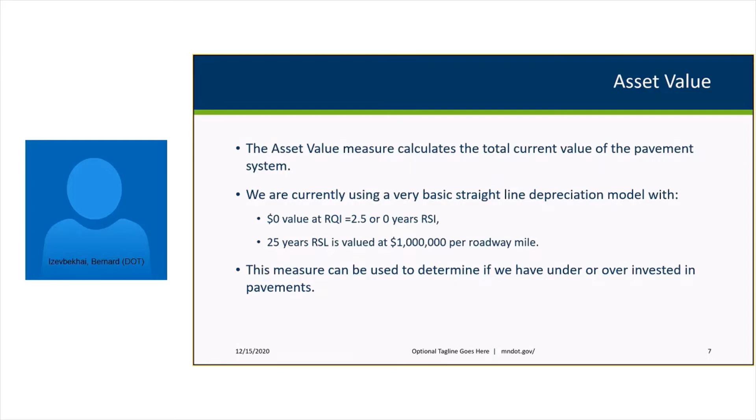There were certain things we did when we were trying to develop what I would call, in those days, a pavement investment manual. Now it's a pavement investment evaluator. The manual actually did compel us to look into the remaining service lives of all the fixes in the network. And at the end of this presentation, you will see that we actually did that. And unbonded overlay happens to be a microcosm of that large analysis that we did.

So there are many health indicators in our network. You have remaining service interval. There's the cost per lane mile. There's the asset value. These are all defined, but time will fail us. There's the asset sustainability ratio.

In other words, by the new construction you did this year, how much have you dealt with the natural decline in remaining service life by the new construction or the new activities that were added to the network in a particular year. So the asset sustainability ratio is a great index. And then, of course, there is the remaining service interval, and there is the asset value.

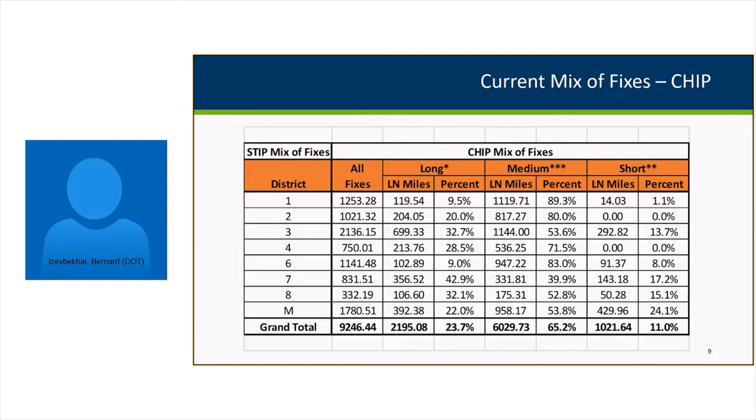But when we mix the long-term fixes and the short-term fixes in an optimized mixture, then we think it helps a great deal. There is a certain analytical method with which I will explain this better as we go along.

Now, what is unbonded overlay? We've been talking about unbonded overlay. If you have a pre-existing concrete pavement, there are many things you can do. You can pulverize it. You can do a crack and seat, or you can build a concrete pavement on it. Remember, you already have real estate right there. So to remove it completely and do a regrade and reconstruction might not be very cost effective. But if you have this existing concrete pavement, there are a few more things you can do.

interlayer. What is that interlayer? Most people call it a bond breaker, but I hasten to say that it's not a bond breaker. It is a stress relief layer. If you don't have it, you have tremendously high stresses. But if you do, you relieve the stresses.

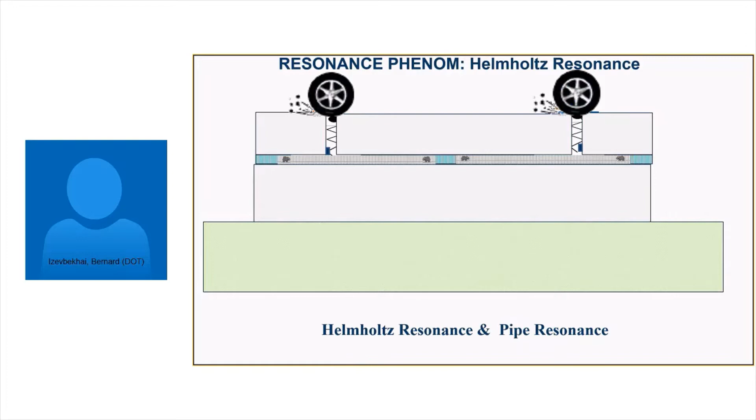With the reduction of such stresses, then there is longevity. No wonder unbonded overlays last very long. If you didn't have that stress relief layer, those tremendously high stresses will cause very early degradation, and it will compromise the service life. So the stress relief layer is a very vital aspect of unbonded overlays. That's the reason why when people call it a bond breaker, I say, no, it's not a bond breaker. It is a stress relief layer.

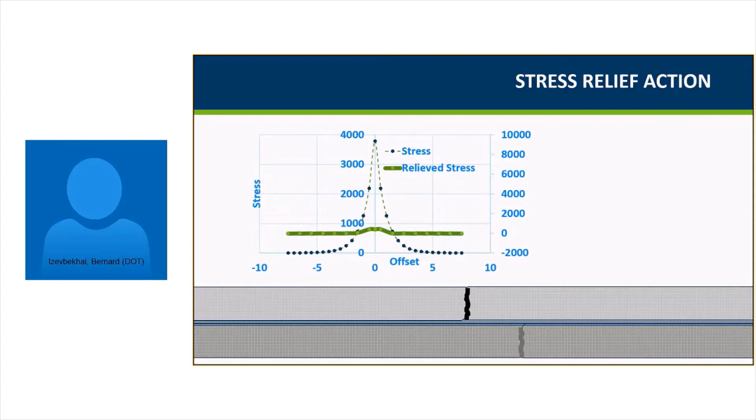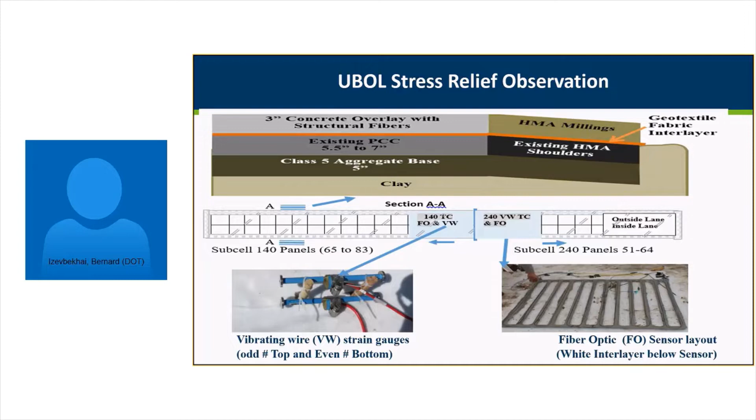To validate the fact that stress relief does occur, we did an experiment at MnROAD. We used fiber optics for the first time in 2013. We put some fiber optic sensors on cell 140 and cell 240, contiguous cells, where we had a thin unbonded overlay, 3 inches. What we found out was very impressive, because hitherto we all assumed that the stress relief layer causes stress relief. Nobody ever really validated it.

There must have been some work done by Khazanovich, and there was a little bit of an inroad into this by Alexandra Akkari and I. We did some work some years ago where we showed that there was some stress relief. Then we used vibrating wire sensors. And so we showed that there was an attenuation of stresses, but we didn't really validate it, and we didn't go out to present it or anything.

Now, cell 240 had a thicker interlayer. We were trying to investigate if we could go down to a thinner interlayer. So the stresses were more reduced with the thicker interlayer than with the thinner interlayer. Now, that has a limit. If we had continued to increase it beyond about 3/4 of an inch, then definitely we're introducing another model altogether, and it's no longer providing the stress relief the way we want it to.

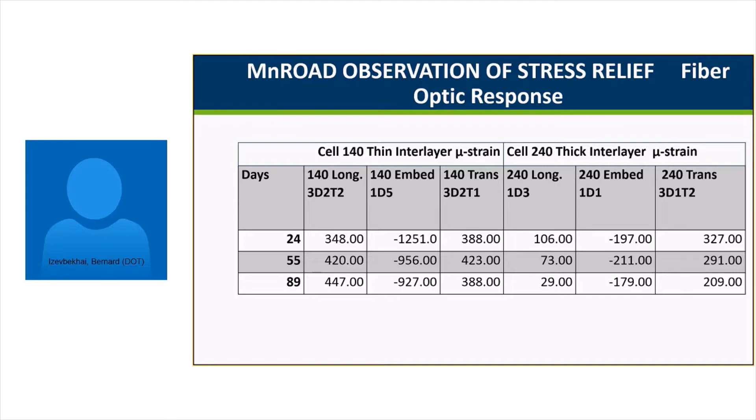And you see that at all times, cell 240 had strains that are less than cell 140. Cell 240 had a thicker interlayer than the thinner interlayer. And these were from fiber optic responses in contiguous cells 140 and 240.

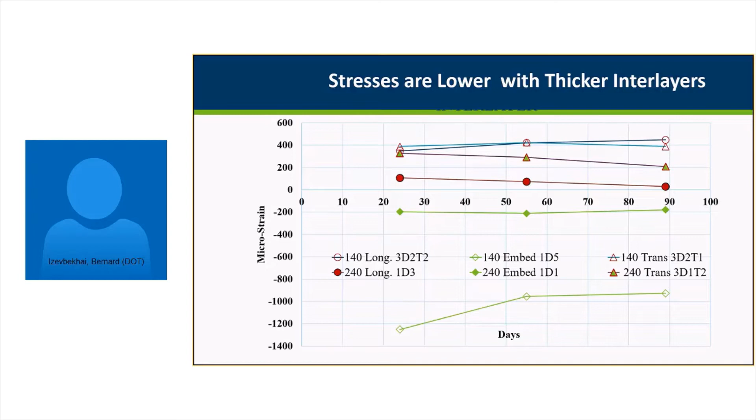I want to talk a little bit about how we sourced our data. Now we've been able to define unbonded overlay, and we have narrowed our analysis to true unbonded overlay. We are not looking at systems where people probably shaved off an asphalt overlay on a concrete pavement and then placed concrete over it and called it unbonded overlay. In that system, I cannot guarantee that you would have stress relief, because most likely you have more than 3/4 of an inch, and then you have a pavement instead of a stress relief layer. So we've narrowed it down to real systems that have interlayers, that have stress relief layers.

So what did we do? We went to our network. We looked at 535,000 rows of data from our pavement management. And then from there, we built a software that extracted 15,800 performance curves. And these performance curves had event markers that showed the times of intervention of various other fixes before the unbonded overlay. The 15,800 included the unbonded overlay. The unbonded overlay had about 850 performance curves of the entire network.

And then we did what we will call a stepwise linear regression, and I will explain that as we proceed. Then we performed the Weibull analysis, because we want to know how our system behaves. How does our unbonded overlay behave? Does it fail early? What is the service life we are getting out of it? And what kind of a window do we have at the beginning within which we can do some preventive maintenance and get this system to last even longer than what we have predicted by the reliability analysis as our expected service life?

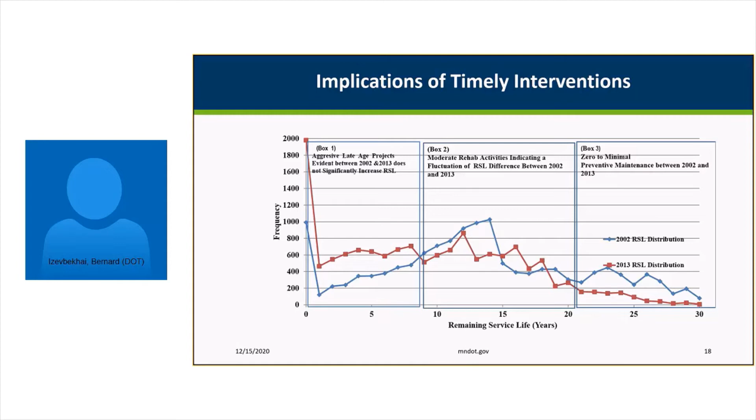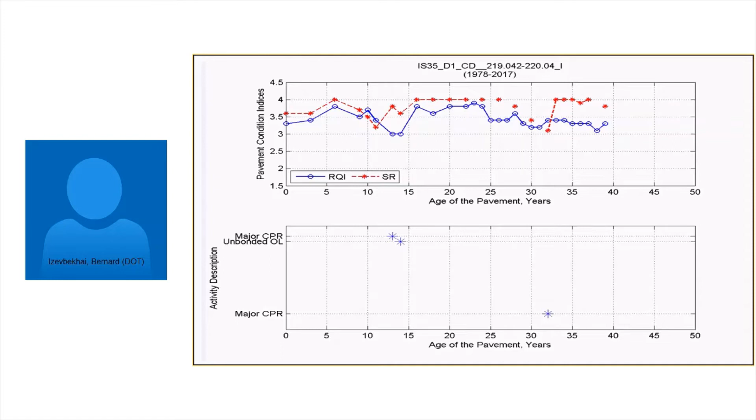And that was the next thing that happened here. You know, I've played with performance models, and I've been able to come up with the fact that one way to look at it, just from elementary calculus, the zone where you can do preventive maintenance, at that zone, your rate of change of your RQI with respect to time is very small. It tends to 0. So we can use that to determine the area where we can do preventive maintenance.

Your maintenance is not preventive when you're already dealing with real distresses, but you do preventive maintenance when the system is still good enough for you to maybe just seal the joints or something like that, or do a little bit of diamond grinding. And then it pays off because it projects that performance curve down the road many years.

But if you follow that performance curve to your right, you get to a point of inflection. And at the point of inflection, your second derivative of your performance curve tends to 0. And that's a point of inflection. I say that at that time you are already changing your rehab from something less aggressive into something more aggressive.

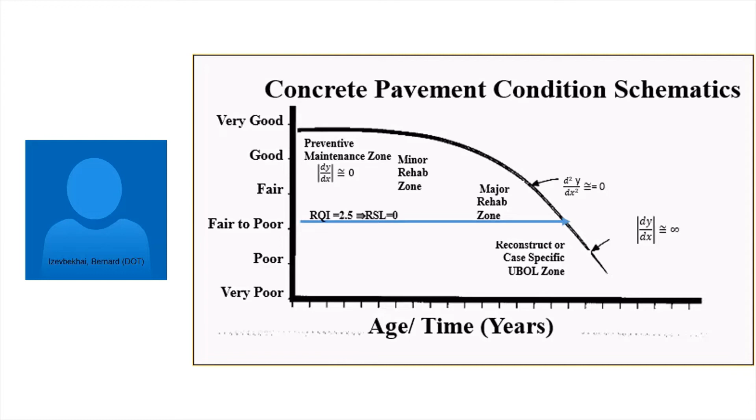And below that, where you see that the rate of change of your performance curve with respect to time is significant, mathematically, I would say, it tends to infinity. That's the point where you do a regrade. That's where you do a reconstruction. And possibly that's where you would do an unbonded overlay.

Now let's look at the performance curve schematically again. There are certain indices that we have defined. When you do an intervention in the network, there's usually a spike in the RQI. Thankfully, we made RQI to be the higher the better. So you can see the RQI underscore spike. That shows the spike. Now, we're trying to find out what predictors we can have for remaining service life. What are these things that can indicate that you have a good remaining service life for a particular fix?

And then there is the time to rehab, TTR. That is the time from the initial construction to the point at which we did our unbonded overlay or did whatever fix we are looking into. And again, we have what we call TTR-MR, which is the time since the most recent rehab. You will see how significant that is later when we begin to wonder which of these variables were significant.

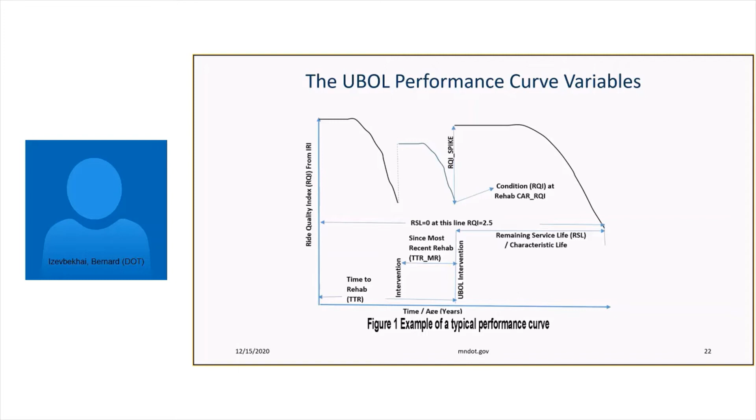Another thing to look at is the sigmoidal curves, which our pavement management uses. There are 4 different model constants. You can see RQI is Q minus e to the power a minus b operating on c to the power t, where t is log of 1 over age, where age is in years. You know, pretty complex formula. However, here you see 4 model constants.

So we thought of an improved model where you have 2 indices. That z you see there, z is the initial condition after your rehab. So z can be a good predictor. And then you have an exponential decay that would occur later, which is typical of any performance curve, where you have our capital B, which is next to e to the power bt. So that's a much simpler model, and we will see how this worked for us.

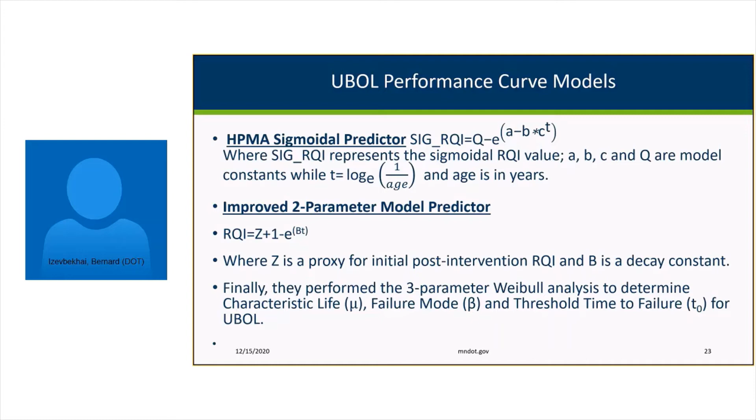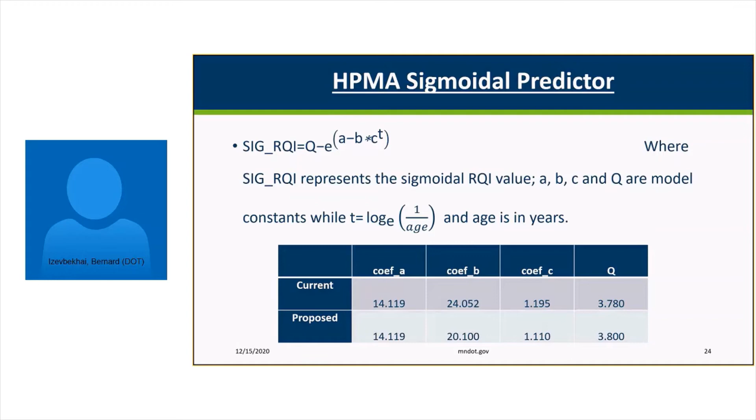We did propose an improvement of the model constants, even though we said they are quite complex when you start dealing with 4 model constants. There was a current one, and then we proposed this after doing our rigorous analysis. And then we looked at how the curves approximated to a Weibull number. Now, the Weibull value for remaining service life, we will talk about that towards the end of the presentation. That was one thing that constrained us. It's very hard for us not to mention Weibull now, but we will deal with it towards the end of this presentation.

And then we have a sigmoidal model, and then we have our simplified model, and we have our model constants. So one thing we did in order to evaluate how close these are to our simplified model, we used what we call the Kullback-Leibler Divergence method. I didn't go into the arithmetic of this, but they are in various papers I can share with individuals who want to know how to do the Kullback-Leibler. These are ways of comparing curves. You can't use statistical methods. You have to use these divergence methods.

And you can see when we have the improved model, our KL was 0.6, which means the divergence between the 2 curves was 0.6. Whereas for the previous model, the divergence was 7.4. Mathematically, that's a tremendously huge divergence compared to how we did the improved model.

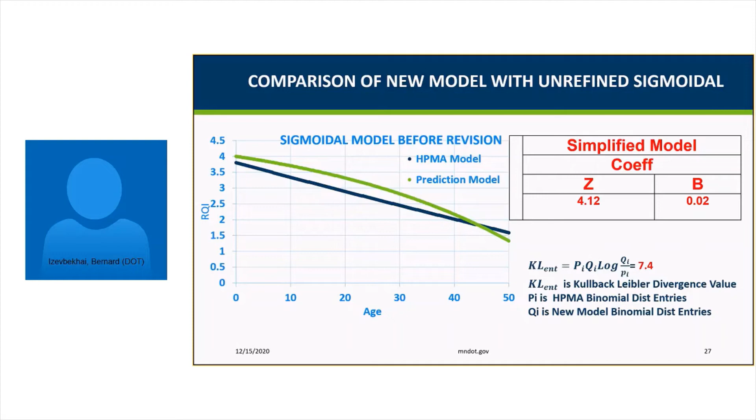And now we will say that if somebody uses our simplified model, the work is less rigorous. You approximate to the sigmoidal model because you have a very small divergence. The Frechet distance method of measuring divergence is another method, but it's more rigorous. So the Kullback-Leibler, I would recommend that to anybody.

So we had a performance of the sigmoidal model: when we improved the model, it gave us 35.5 years. And then the 2-parameter sigmoidal model gave us 35.8 years. Now back to our prediction variables. We wanted to say, instead of measuring remaining service life, what can we do? Can we find some other indices, some other variables that are easier to measure, that are easier to decipher, and use them?

So we looked at what I had talked about before, the starting variables: time to initial rehab, time from the most recent rehab, condition at rehab, condition of the surface rating at rehab, then the spike. We fed them into a statistical program called Statistix. It ends with an X. And we did what we call the stepwise regression analysis. I want to tell you why we do stepwise regression analysis.

If you have very many independent variables, your model is likely to be good just because there are many. Good in the sense that your R squared is high, right? But you can have a very good R squared for the temperature variation in Minnesota and the rate at which birds flap their wings in Guatemala. It doesn't mean anything.

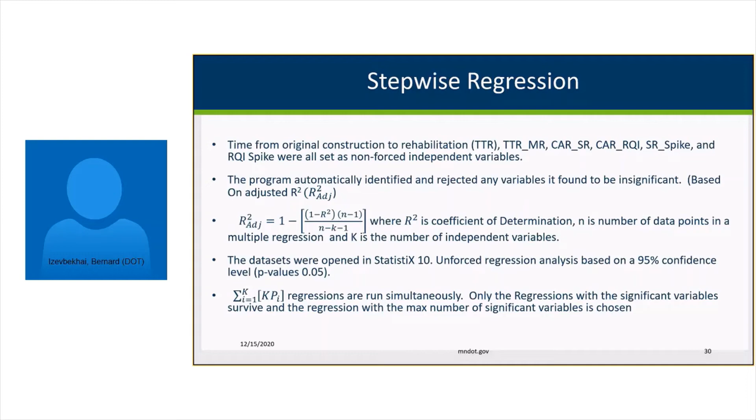And the result we got from that stepwise regression analysis was that the time from the most recent rehab was significant. Now, the others, not that I dropped them, the regression process dropped them, because the p-value we got there was higher than 0.05. That was our threshold. So with the p-value much higher than 0.05, we say that's not significant. But again, if somebody had chosen a p-value of 0.1, some of them may be significant.

And the ones that came close are the CAR RQI. That's the condition at rehab. That came close, but it didn't make it with a 0.05 significance.

I just want to mention that there is a reason why the time since the most recent rehab is significant. The reason is this: if you do a Markovian analysis, the Markov chain says that it's a memoryless process. In other words, it doesn't remember what happened prior to your immediate analysis. Now, the Markovian assumption is very strong.

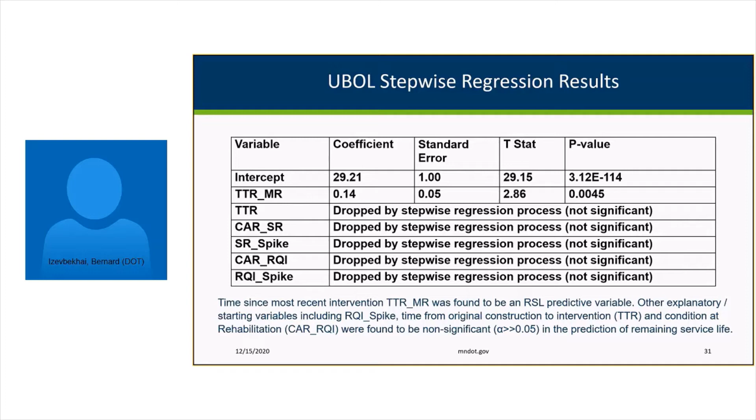What this model is telling us here is that the Markovian assumption works with unbonded overlay. After you've done very many things over the years, what you can use as a predictor is the time since your very last intervention, not the time since you did your original construction. So that validates the Markovian assumption. We didn't help the process. It just gave us that answer, and we found that to be real.

Now, I want to talk briefly about the Weibull analysis, which we did. The reason why we do Weibull analysis is that it gives us not just a stochastic analysis.

Weibull analysis does not assume that you have a normal distribution. It tells you what kind of distribution you have, and it gives you the three Weibull solutions that we are looking for, which is the preventive maintenance window, the failure mode, whether it's failing early or failing randomly or failing at the end of life. A good design will fail at the end of life. And then also the remaining service life.

Now, why I'm an advocate of the Weibull method is that it started with infrastructure. But when the manufacturers stole it, they held on to it over the years. And now it looks as if we are virtually begging them for us to use it. It belongs to us. We are supposed to use it in our infrastructure because it's highly repeatable. If you do the Weibull analysis, you get the same results in Australia as I'm getting here right now. You get the same results in Nigeria. So it's a strong method.

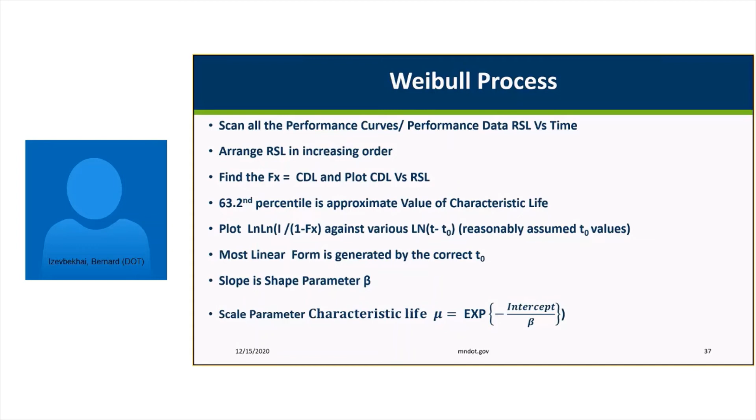And then we get the shape parameter by getting the slope. And based on the slope, we can now find the remaining service life or the characteristic life by operating on the intercept and the beta, which was the slope. So these are simple mathematical processes. You can see here that we don't use the probability density function. It's a little bit too complex, but the cumulative density function is shown below. Your CDF is the F(x) that is shown there.

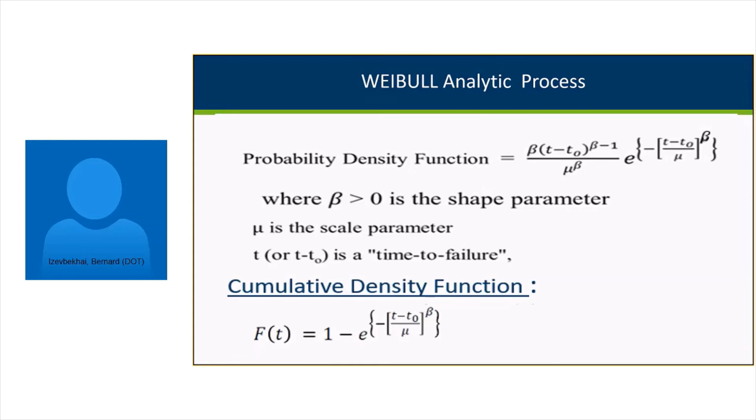So it's normalizing this weird looking function that you get the various solutions, which is mu, the remaining service life, beta, the failure mode, and then T0, the threshold time. I will skip this slide.

So in the linearization, we assume certain values of T0. That's one way of doing it. And the one that gives you the most linear plot is most likely the solution of T0. Otherwise, there is a method of finding T0, which was made popular by some researchers in England. And that value is shown there.

So here are some of the results we got. We did that, and we found that our 63.2 percentile value is 36.5 years. And then we went further using that scale parameter, using that equation where we consider only the parabolic portion of this curve. Then we were able to find a value for T0 of 7 years.

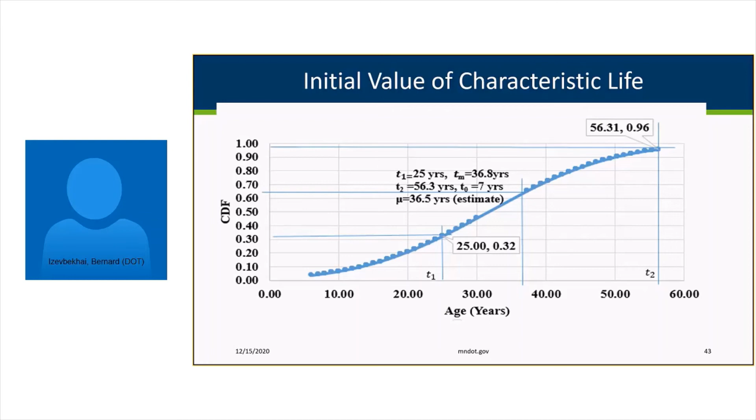If you look at this, what's the meaning of this? I want to preempt our value of beta by saying that if you have beta that's less than 1, it means your system is failing early. If you have beta that's close to 1, it means that you have random failure, which is uniform rate of failure. Now, the higher your beta is away from 1, the more likely it is an end-of-life failure.

And when it's between 1 and 2, it's like a log normal distribution. But when it starts to approach 3.5, you are coming close to the normal distribution. So Weibull doesn't assume any of this. The solution tells you what kind of distribution you have.

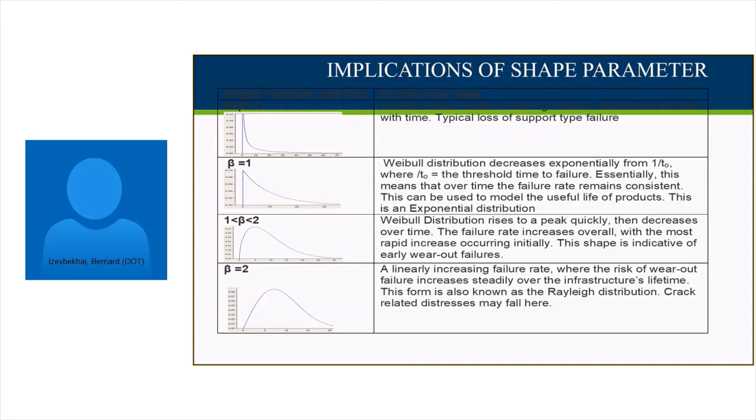So we got 1.32 as our Weibull shape parameter, which is the failure mode. This tells us that it's a quasi-random failure, but in the direction of an end-of-life type failure that we had.

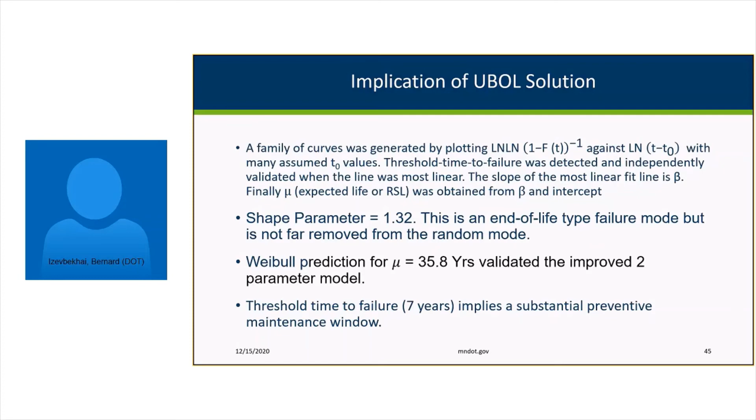And then the prediction model also showed 35.8 for service life, which is a validation of what we did with the performance curves. And with a threshold time of failure of 7 years, it tells you that you have a substantial window within which you can do a lot of preventive maintenance and improve your system to even get more than 35 years of remaining service life.

I'm going to run through the remaining slides. This is still validation. This is how we plotted the curve, how we normalized it and got our mu. We got our mu in 2 different ways. We got our beta in 2 different ways, and we got our T0 in 2 different ways. So that is one way of cross-checking and making sure we've done the right thing.

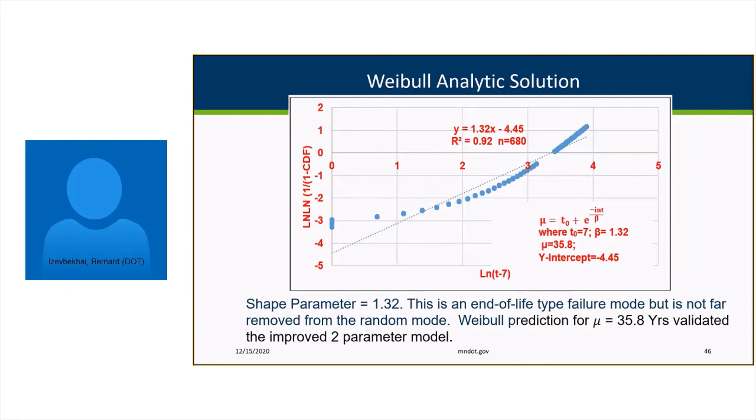Now, having said that, I want to say that we did the same analysis for all the fixes in the network. And here, this table shows us the various remaining service life we got. The 6th column shows us the failure mode. The 5th column shows us the Weibull life. And we can see that the T0 there actually shows you what kind of windows you have. You can see your unbonded overlay there. We have 7 years as your threshold time of failure.

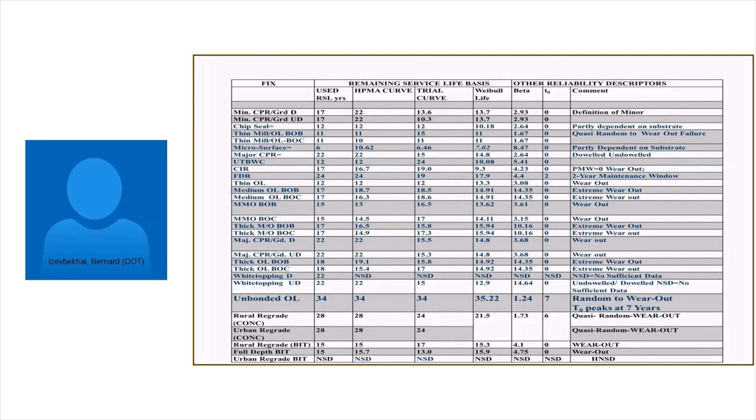So in closing, I'd like to say that we have actually proven that the remaining service life for unbonded overlay is 36 years. That makes it a huge investment. If you weigh it against the cost of unbonded, all you need to do is compare it to a regrade. If you compare it to a regrade, you are saving a lot by doing unbonded overlay.

And the study also validates the Markovian assumption that the time from the most recent rehab actually is a predictor of remaining service life. We did not distinguish between PASSRC, that's permeable asphalt stabilized stress relief course, and the non-woven geofabric in this research. We just treated the regular interlayers as interlayer, and then we walked along. So that's one of the limitations we have here.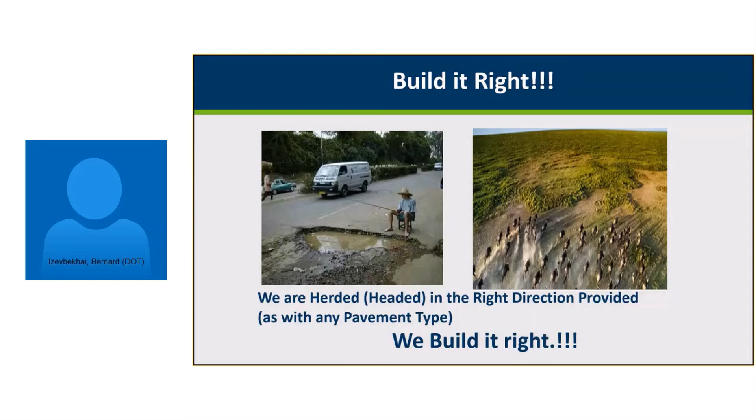They are not very popular, but they are very good. And I can assure you that if we build it right, then we are definitely headed in the right direction. We don't want our pavement to become a fish pond, like you see in that picture. So with that, I always say that the more you look, the less you see. So that's what this slide tells us. I thank you for your time.

Thank you, Bernard. We do have a question here in the chat box, and he apologizes if he missed it earlier. Did you take into account user delay costs in economic considerations? Yes, user costs in concrete pavement. User costs are of tremendous importance. And we are addressing this in another study, and that's the strength at opening to traffic.

We deliberately loaded some concrete pavements early in our MnROAD research facility. We loaded those concrete sequentially early, some earlier than others, and we're trying to see if there will be short-term or long-term degradation on account of that early loading. So we're trying to shrink the user delay costs that are implicit in concrete paving. We're addressing that in that other study.

Another area where unbonded overlay is useful is that you are building on an existing pavement. You're not doing a regrade. So you're not going to cause user delay costs over a long period of time as you would in a regrade. So your unbonded overlay saves you those user delay costs that would have been implicit in using the regrade or complete reconstruction. Yes, that's a very valid point.

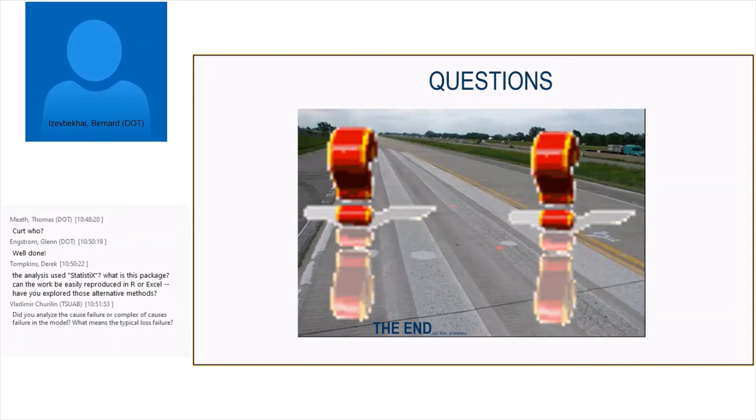Excel doesn't have stepwise regression analysis. So if you want to do it by yourself, you have to do the various combinations of the independent variables. If you have 6 of them, God bless you. You have to do it with 4, with 3, with 2, and so on. You'll be tired at the end and you will have forgotten which results you got at the beginning. So yeah, Statistix has that good advantage. I believe R has stepwise regression analysis as well.

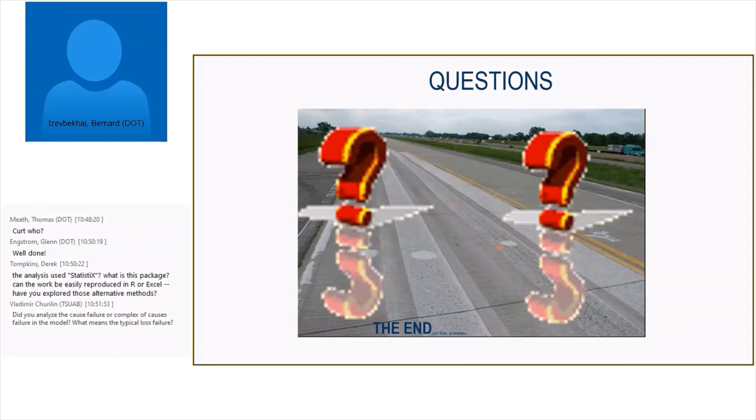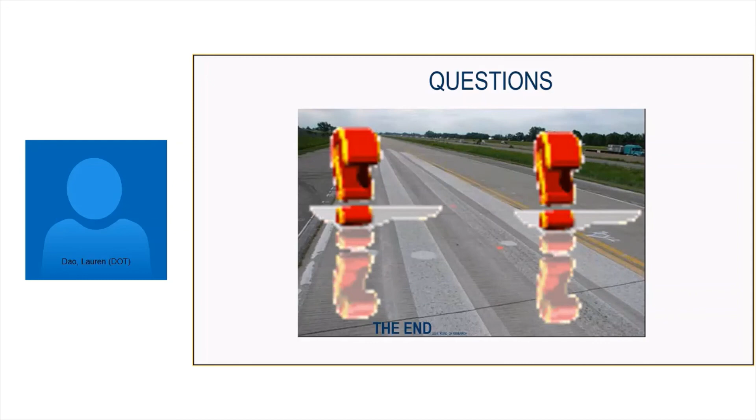Did you analyze the cause of failure or complex of causes of failure in the model? What is the typical failure? Well, when we were doing the pavement investment manual, or pavement investment guide, we were actually looking at that holistically. And I believe the pavement investment evaluator is looking at that.

What this analysis actually looks into is service life, maintenance window, failure mode. That's all this looks into. But this is a microcosm of a larger study where all those were brought into cognizance.

And I believe the pavement investment evaluator still carries that overall goal, which was set at the beginning when it was the pavement investment guide. But this particular analysis that we're talking about today deals with how we got the service life. And our failure has been defined: 2.5 RQI is remaining service life of 0. We are saying that at that point, there's no remaining service life of the pavement. It has failed. Okay. So everything is based on that definition.

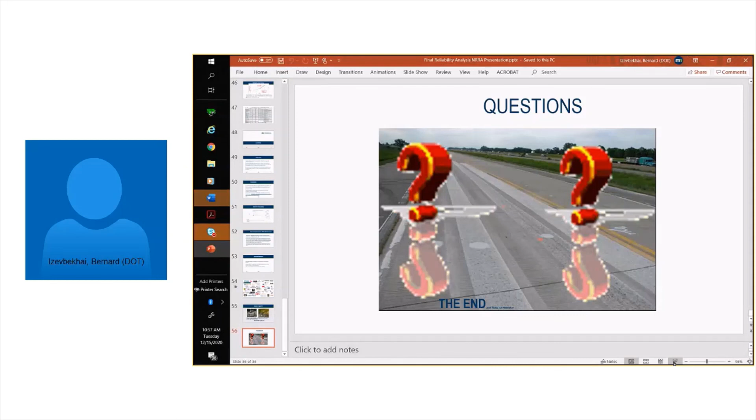But what we have here is jointed plain doweled concrete pavement. That's what we have in Minnesota. It's not continuously reinforced. So this analysis does not include continuously reinforced overlay. Neither does it include the overlay on CRCP. But if we are doing this on CRCP, having a bonded overlay or an unbonded overlay with jointed pavement on a CRCP, we'll have less trouble with that because you have fewer of those joints, whose stresses we are trying to reduce by using the interlayer.

I'm sure the performance will be better. If we put a jointed plain on a CRCP, the performance will be better. But if you want to use a CRCP on a CRCP, we need to analyze that. And I can work with Texas DOT to find out how that works.